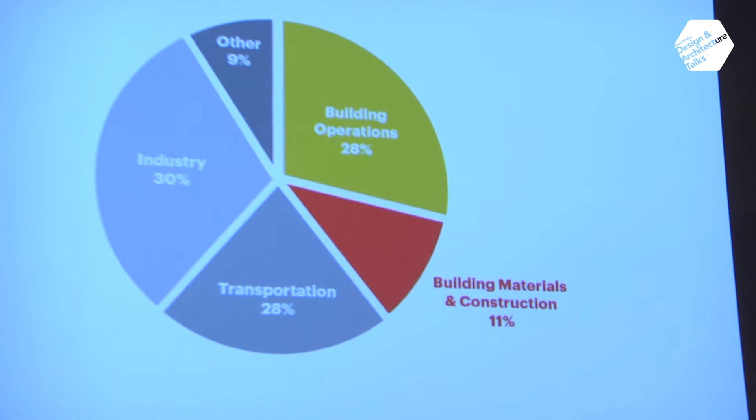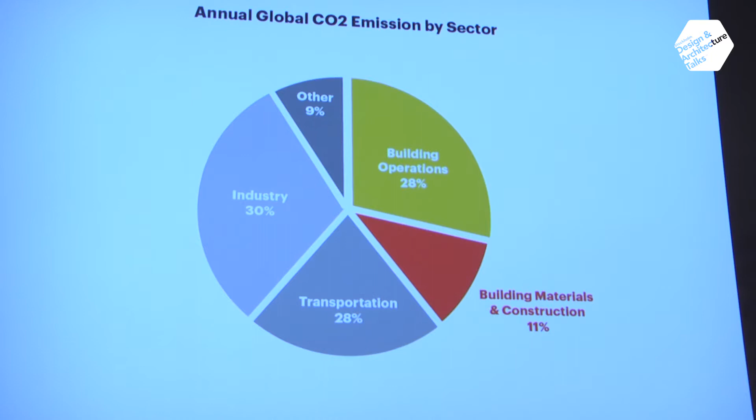It's such a fundamental, massive question when you think about what half is. First is, what are we talking about? Half of what, right? So we think about global emissions on an annual basis, 40% of emissions are attributed to the built environment. Of that, roughly 30% is the operations of a building—the heating, cooling, lighting of that building—and the other 11% is the embodied carbon of the project, the actual carbon required to make a project, make a chair.

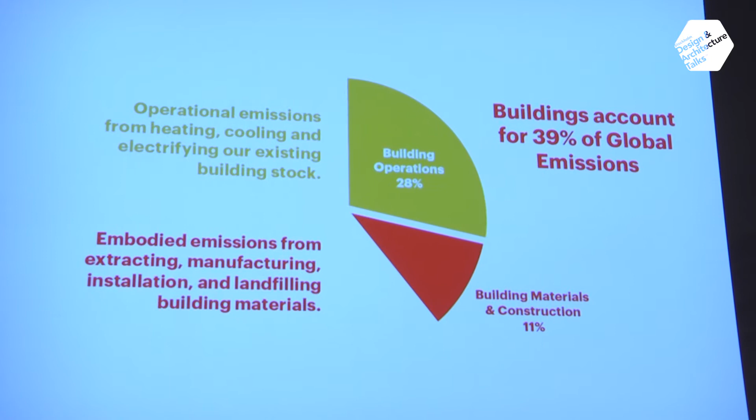I think the fundamental thing that I've come to learn over the last year is this question of embodied carbon has been a complete blind spot for everybody in our industry until very recently. Certainly through my education, there were two words that were never even spoken around a lecture. What this means is that every month, right now, we're constructing the equivalent of New York City—not just the city of Manhattan, but all five boroughs—and that total square meterage of that city is being built into the world every month. And that means every year we're going to add that much square meterage to the operational budget as well, which only makes that thing even bigger.

Fast forward a little bit, a lot of this footage is going to find its place in Africa, in India, in developing settings, primarily where I've been working over the last five years and where I'll be showing you. So it's pretty important that we get this figured out right now, certainly in places like Europe that are in the middle of this, but very important that we figure this out in the parts of the world that are going to build a lot. And this challenge is massive when you think about it.

When you begin to just get your head around it—how do we halve the operational emissions of our current building stock? I'll talk about this room right now. This room doesn't have a shred of natural light coming into it; the entire thing is fed by a mechanical system forcing air into it. If we said to the exhibition, cut your utility bill tomorrow, what would they do? Massive problem. And then the other half is everything you build from today—how do you have half the footprint of the last project you just did? Where would you start? This chair—how could you cut half the carbon of that chair that we're all sitting on?

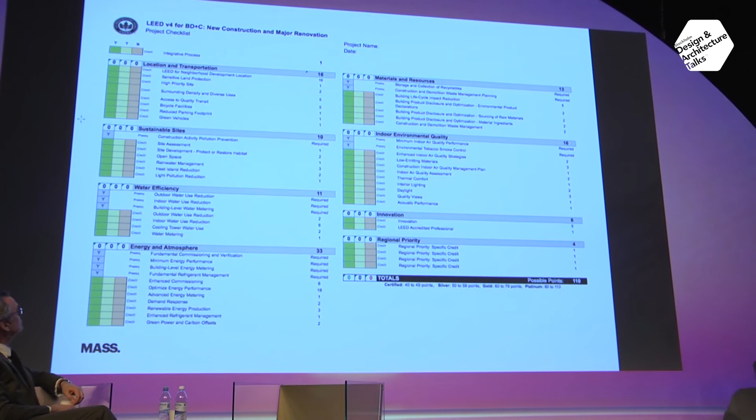Recently, it's encouraging to see materials and resources being reflected on a LEED checklist. 10 years ago, anything embodied wasn't even part of the calculus.

This has led to a mode of practice. This is from my governing body earlier, or this time last year, that really set me down this path of: what the hell are we doing?

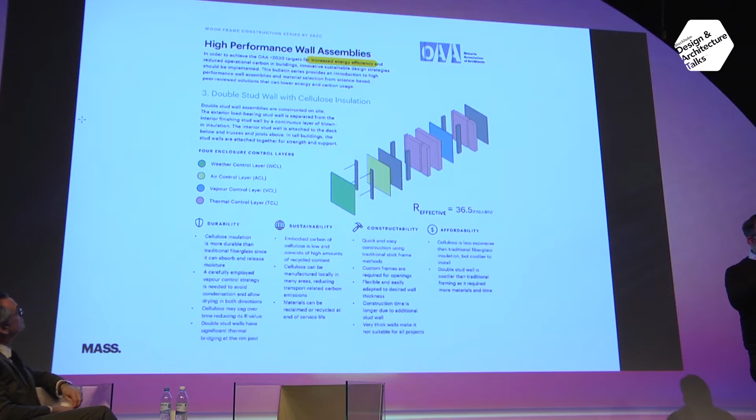This email talks about increased energy efficiency through 13 distinct layers, and how this is how we're going to move forward to meet the 2030 target of half. I started thinking, okay, what are you talking about? 7 3/8 inch EPS foam core, 3 inches of rigid mineral foam. What is that? Lightweight cladding.

There's that little green layer on the outside. This is what my professional body is telling me is the future of practice, right? Self-adhered liquid applied air control layers. Surely this is not the material we should be using.

In the 90s, in my childhood, born 1978, I recall vividly big movements forcing McDonald's to get rid of these materials from our food chain. We moved to paper. We, as architects, celebrate this material. We quite literally conceive our buildings out of it.

That's messed up. So this blue foam, this is like one element. When you dig into what blue foam is doing, is it sustainability? Look at all the things that blue foam does compared to rock wool and phenolic foam.

These are the materials that we are using to build our environment. This is what it's doing to the environment. So we're thinking about energy efficiency, high R value. We haven't paid any attention to all the other things around this, and I'll speak specifically around ozone depletion.

On the left is pretty much most of the building stock built after 1980. And on the right is a document from 1974 out of the AA. I continue to look at these and just think about how we have forgotten what it means to practice. We have forgotten how to build. We knew this at one point.

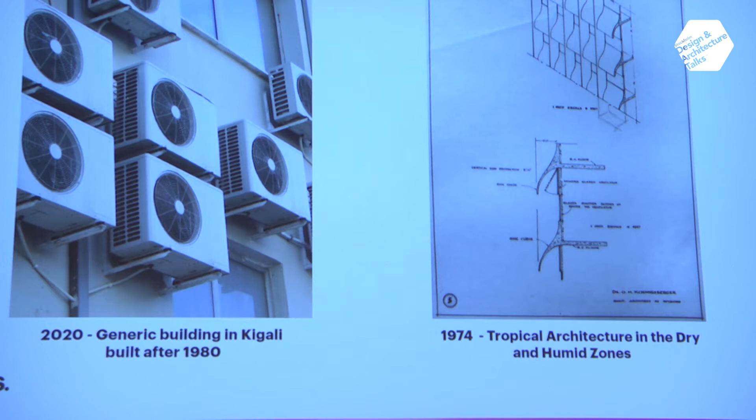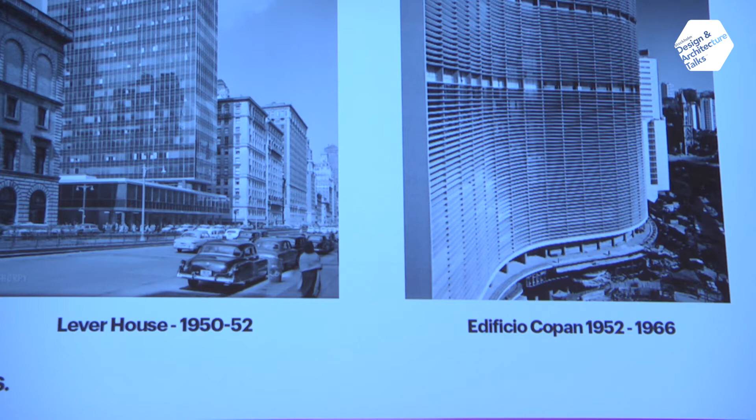What happened? Well, my basic theory on this is that there were two buildings built in the 50s that are pretty iconic. The one on the left, downtown, by Gordon Bunshaft, and the one on the right in Sao Paulo by Niemeyer. One of them considers the environment and one does not. And over time, one has won out.

And this was taken earlier this week. The building on the left is going up in droves, and the buildings on the right are coming down. This is the direction our world is headed, as if to say we have forgotten everything we've known, and we're rapidly moving forward towards a future that's completely unlivable. So I would argue we make a return to passive systems, maybe put some skylights in this building.

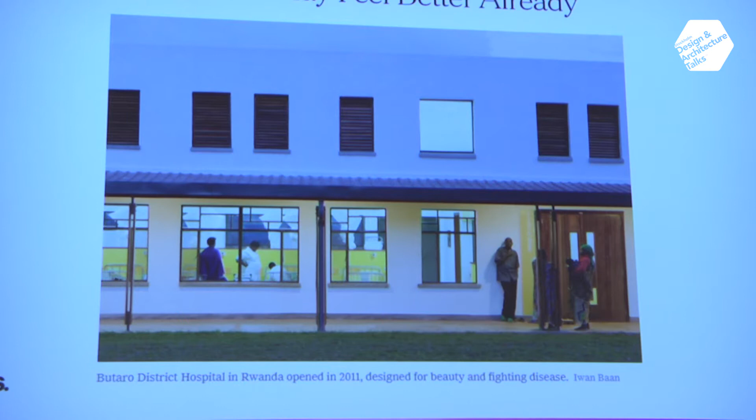We started, again, in Butaro, with this hospital, where there was no power. There was very little even by way of water, and this was a great opportunity. These constraints were like, oh wow, first principles—let's think about natural ventilation and lighting in healthcare.

We worked with two big thinkers, Paul Farmer, the founder of Partners in Health, and Dr. Agnes Binagwaho, who was the Minister of Health at that time. We literally sat down with them for a year to design a hospital, hand in hand with the doctors that would ultimately run it.

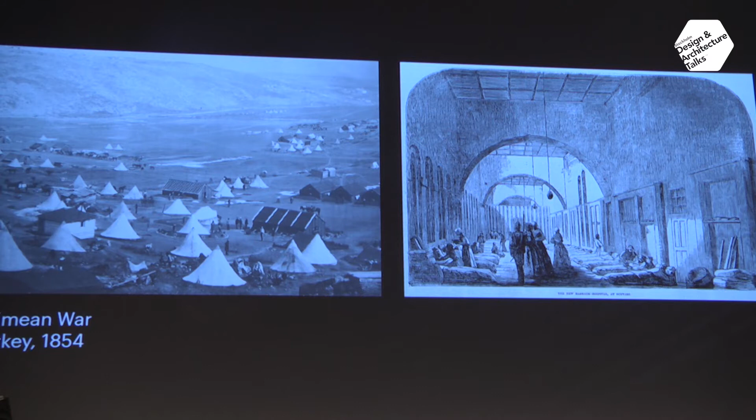If you look back in history, Nightingale knew this. She intuitively said, people in these tents in the Crimean War, they're getting sicker as I care for them—we need to rectify this. She came up with the Nightingale Ward, which served as a kind of model for healthcare for about 40 years.

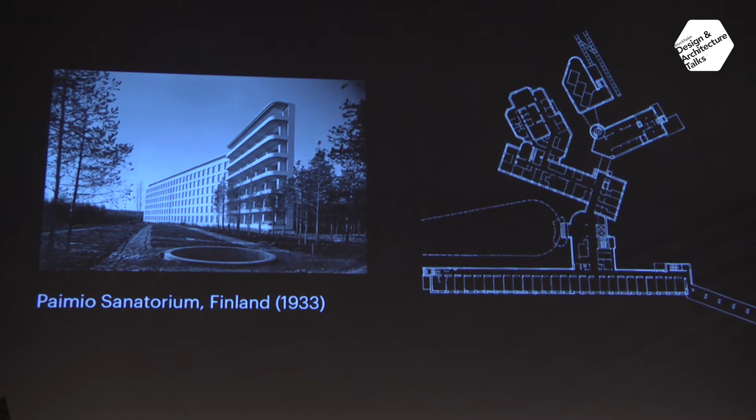I had the pleasure of visiting this project last spring—similar thinking about passive ventilation, access to light and air in a space. Sad to see this is not even functioning as a healthcare facility anymore. And what's happened over the last century is this.

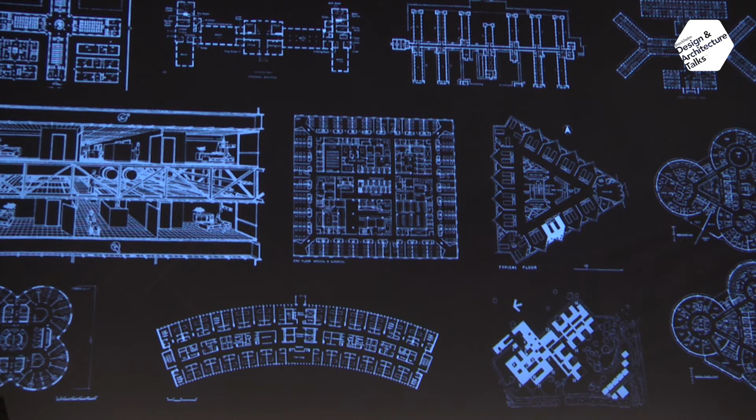We moved from Nightingale wards around to ultimately the room my son was born in, which looked much like this, a box, not unlike the building we're in right now, which is alienating. It has no access to the outdoor environment. If you work as a doctor, they have the worst working environments of any profession I can imagine. They literally can work a shift without seeing the outdoors.

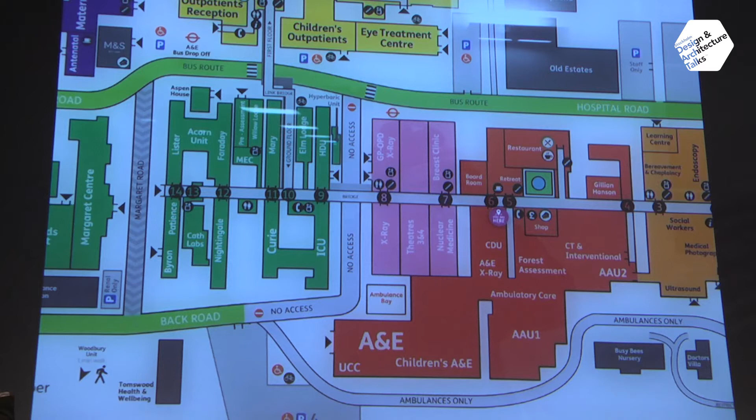This is the hospital that I spent some time in over Christmas, which, as you can see, is basically a Frankenstein of all these typologies put together, which you get lost in. They're very difficult places to understand. And this is the state of a lot of healthcare infrastructure around the world.

So we said, okay, let's not do that. We don't have electricity. Let's limit the floor plate, make sure that we don't need lighting in the event of a brownout. We don't have forced air. Let's use convection and kind of passive ventilation to make sure that the room is getting its air changes. We put all the medical gases and power outlets into one wall as opposed to two.

We kind of inverted the Nightingale, so in the event that you need to upgrade things, it's pretty easy to renovate the space and retrofit it. And the beds lastly face out, they face out to the landscape as opposed to facing in. So as a patient, you have a view to the landscape. All the circulation is exterior as opposed to inboard. And finally, it's a part of the world you should be looking out.

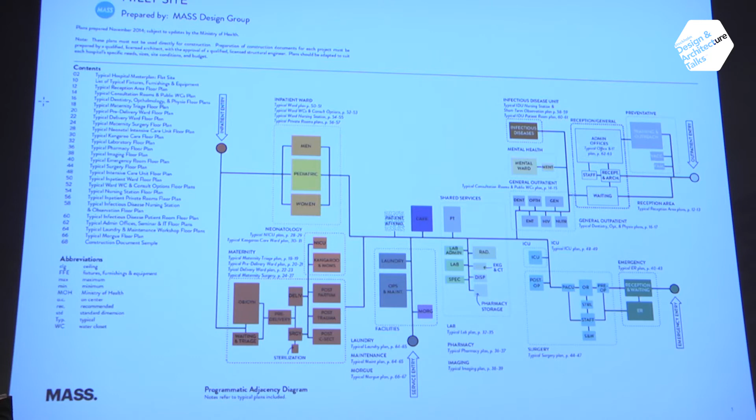Beautiful. Recovery times, apparently at this hospital, are far better than the one neighboring. On the back of that, the ministry said, great job, guys, we have 31 more. Okay, well, let's help you develop kind of the DNA for these other hospitals and unpack the ones that exist. How can we reconfigure them and make sure that any addition you do in the future is done intelligently?

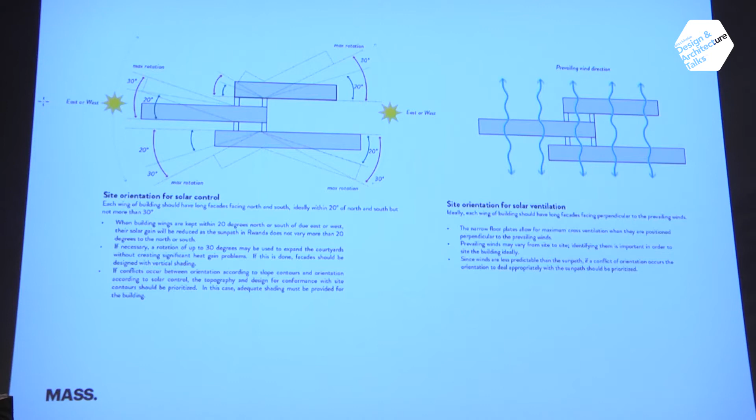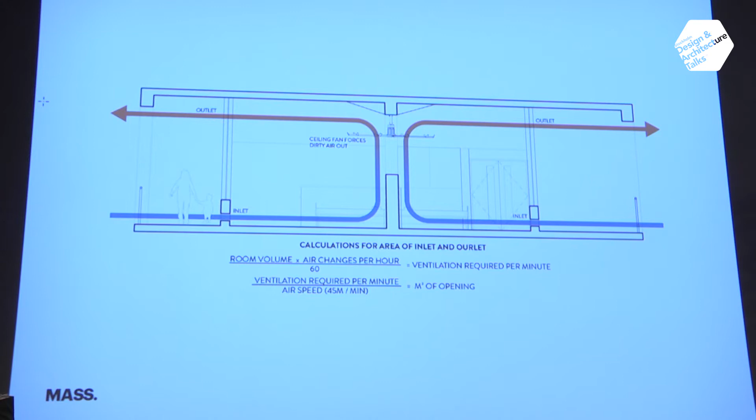Basic instructions for the procurement department: how do you site buildings, how do you make sure that you're orienting correctly for wind, for sun, how do you look at things through basic thermodynamics, the heat coming off your body to help buoyancy in a room, so you don't need ventilation or fans in the event of outages. You're going to get those air changes just through understanding basic thermodynamics. The floor plans are these heavily annotated documents, so that anybody can read them, not just to say build this, but understand why, so that if another designer comes along, they can take it and modify it around the parameters, the kind of minimums and maximums that we established.

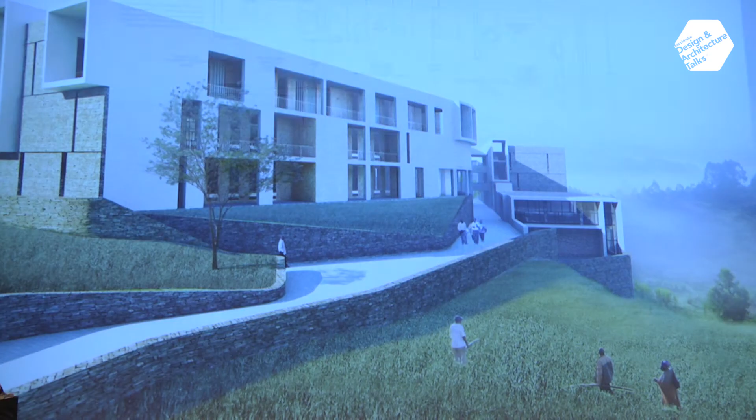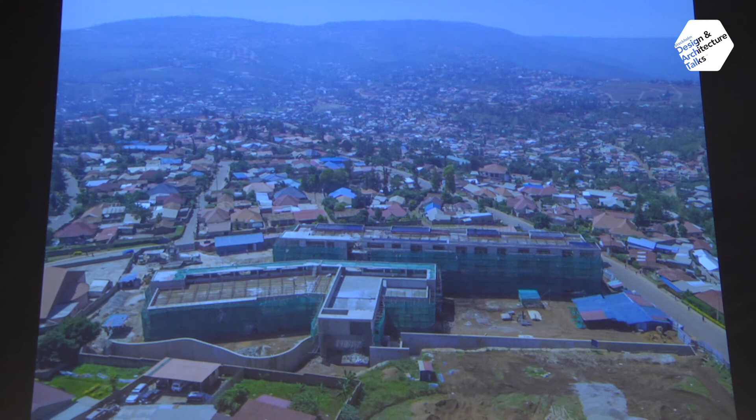They asked us then to test drive—okay, good, we want to see a couple of these. So this is the Munini District Hospital, in a very rural part of the country, due to be completed this year. And they said, let's do another one, but let's do it in Kigali. So this is Nyarugenge. This is the rendering, and this is yesterday—it's almost complete.

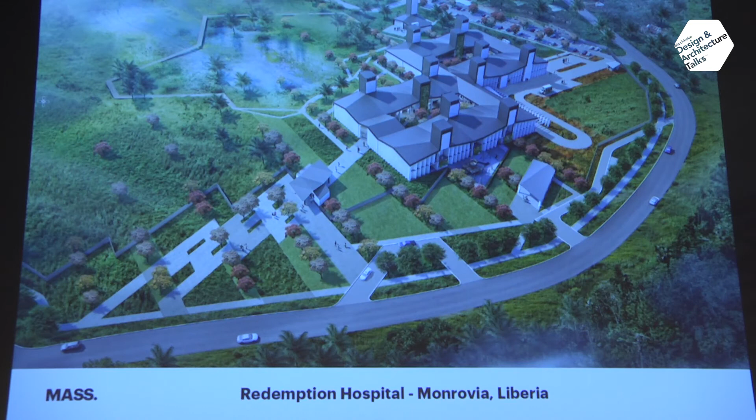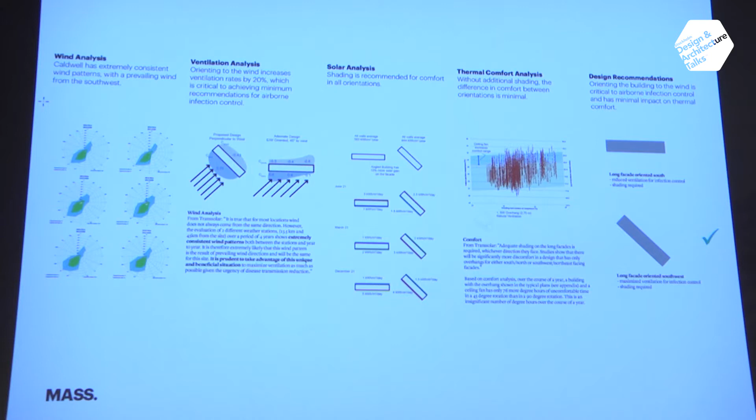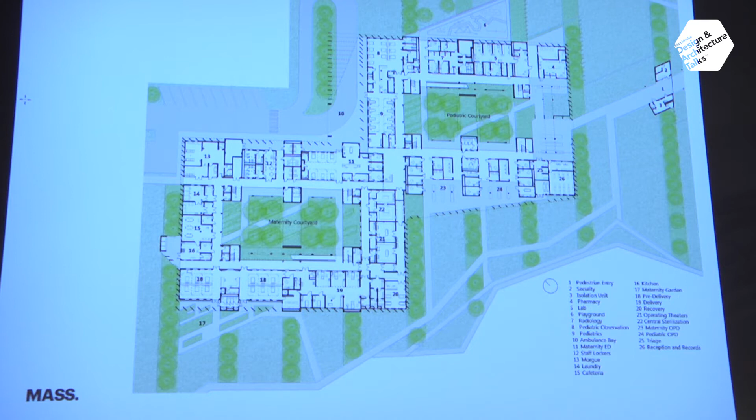We then asked to go to Liberia, a totally different environment, not at elevation, hot, humid, rainy, to do the Redemption building, working with Transsolar—similar thing. How does this building breathe by itself? How do we get buoyancy in a room? So we adopted solar chimneys as the main strategy for airflow. You can see these kind of knuckled courtyard buildings here, and the stairwells kind of double as that duct, the kind of large ductwork for the project. And ultimately then the chimneys become the totemic items of it, like the reading of its performance becomes its architecture.

I'll move to the embodied part. I think that the passive stuff seems obvious when you look in history. We just need to start doing it again.

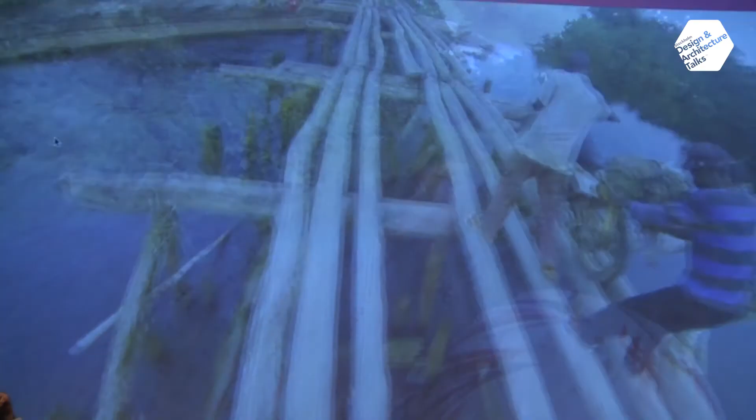I'll show you two projects that talk to this. The first is a school in Ilima, Congo, and there's a little movie here. Turn the volume up a little bit.

We were asked by the African Wildlife Foundation to help them build a school in this part of Congo that had an endangered species next to it, where they brokered a deal with the community: we'll build you a school, we'll teach you how to farm, stop hunting this endangered species.

This is what the school looked like when we started. The first thing we did, we spent three weeks in the community, meeting the people there, understanding what they need, what materials are available, what trades exist, where things come from. We looked at what they're building out of, and we took a bunch of these back to the lab and performed compressive strength tests on them to understand—okay, can we use this stuff?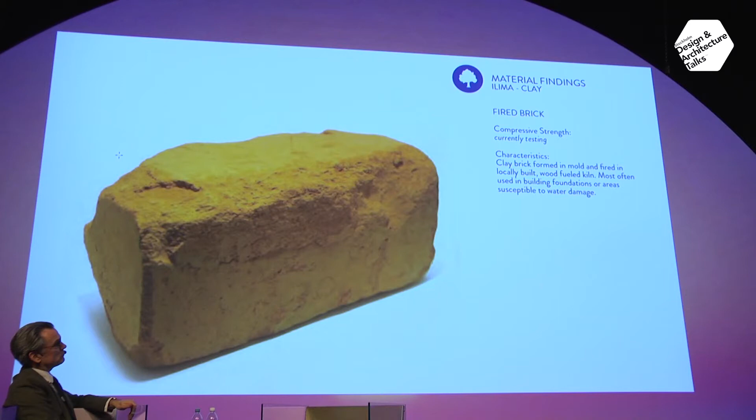So this is one of the local bricks. A lot of the weaving that they're using is this kind of rattan, which we've seen everywhere.

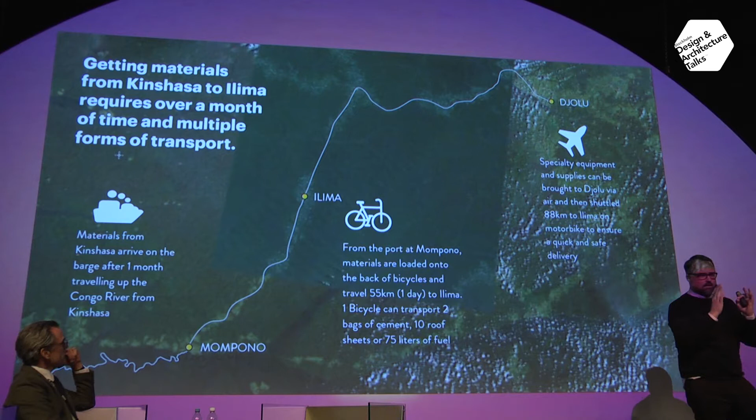To get to Ilima is extraordinarily difficult. From Kinshasa, which is really the center of the entire country's economy, it takes up to a month to send things on barge to this little town called Mompono. From there it would travel about 55 kilometers along a path as narrow as your shoulders on the back of a dirt bike to get to the site. So that instantly really limits your material palette of what you can bring in to build with, to what can fit on the back of a motorcycle.

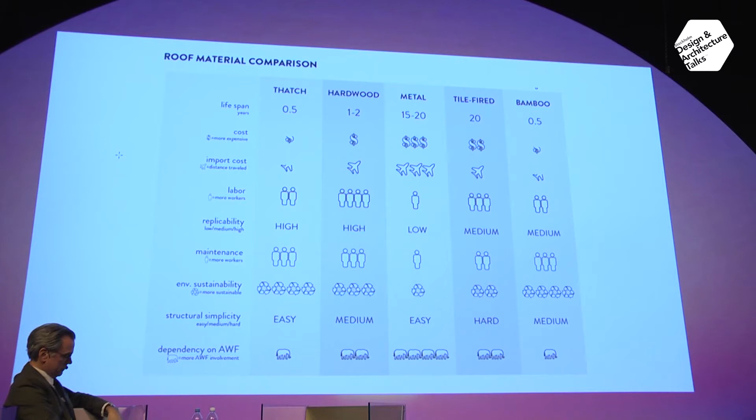We use that kind of comparative table of—what are you going to build out of this? What's it cost? How many people does it hire?—to build up an understanding of what we should make the building out of. Our hand was really forced to us that most of it has to come nearby. Most of the project is sourced within 10 kilometers of the site, and we imported things like nails, hammers, and saws.

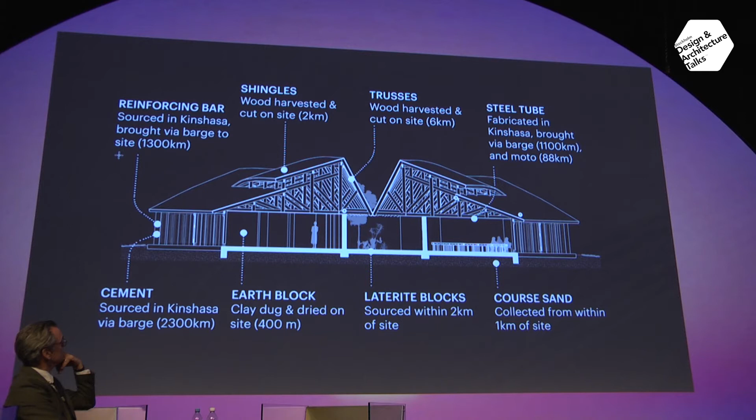The roof tile, I think from material innovation, we took a lot of wood samples back and found this specific hardwood had a lot of similar properties with cedar, so it would work really well as a shingle. We brought in people to teach them how to froe a cedar shingle—obviously a well-known tradition, certainly in parts of North America.

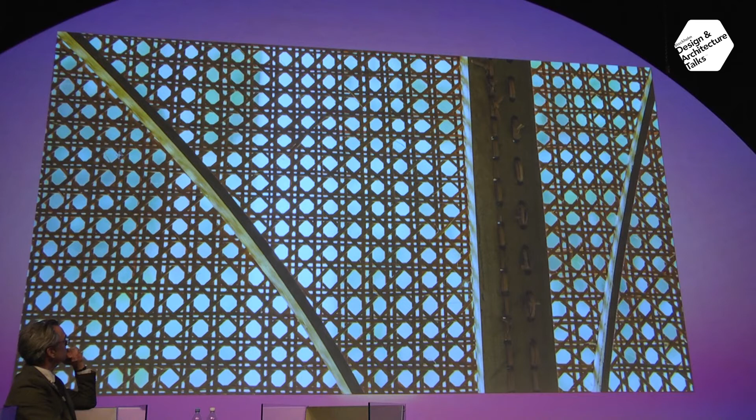The rattan was used as a screen device for a lot of the doors and windows. As you can see here, the whole project kind of opens up to the large playground.

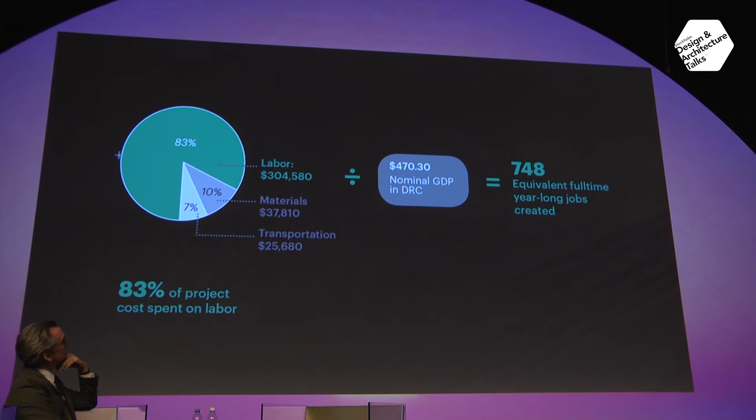We were really looking at this question of impact. What impact is this project having economically? We didn't have a lot of money to build this project, it's about $350,000 to build a school. And of that, how many people were hired? Great, we hired pretty much everybody in this community, and understand the unemployment rate in this part of Congo is probably like 98%. So we gave people jobs and skills that they can take elsewhere.

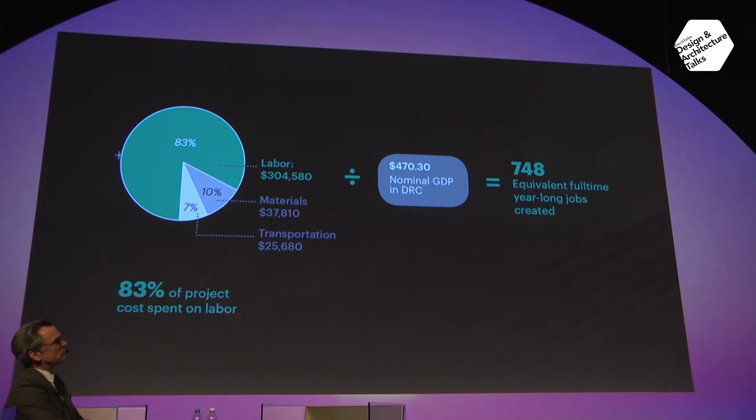Where was it spent? In a country historically known for pillaging its territory, where most of the money funnels to Kinshasa, as you can see, most of it didn't. Most of it really just found itself very locally to this project, which is great. Again, very little by way of development in this part of Congo.

And from a carbon footprint, it's almost embarrassing how good it is - 28 times less than a global average. This is what's possible when you source locally and find materials around you that have low footprints. It's just a question of searching and asking.

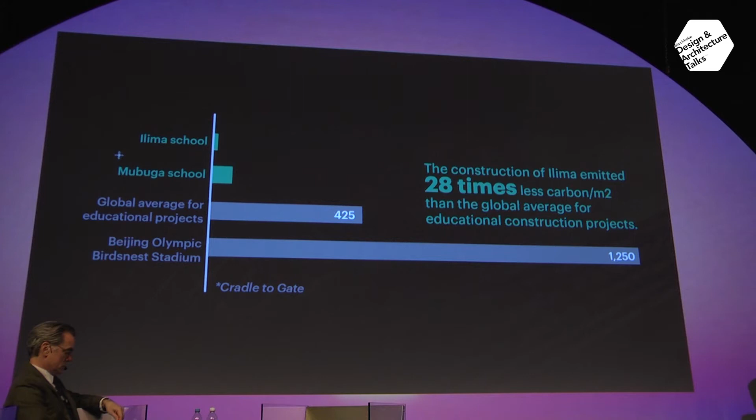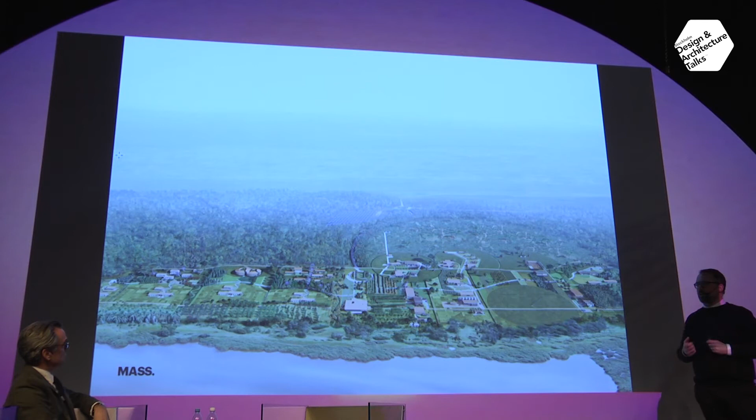The last project I'll show is this School of Agriculture. So 3 years ago, we were asked by the Howard Buffett Foundation to work with them to develop a whole ground-up school of conservation agriculture. They see agriculture in this part of the world as the pathway to peace, and more of a conservation agriculture, not as a replication of Western industrial agriculture, but as a way to actually have ecology and farming together through the notions of One Health.

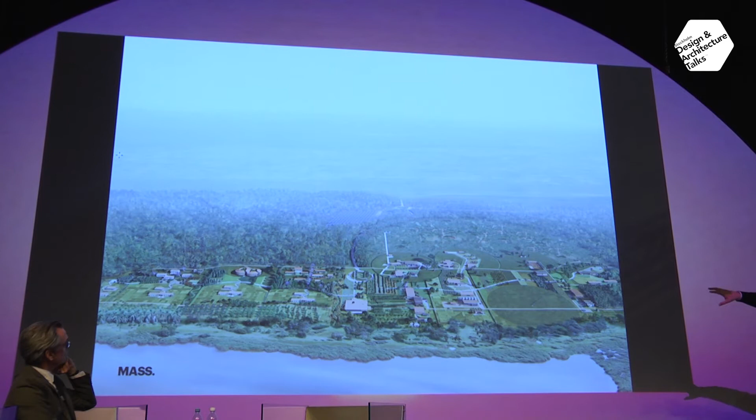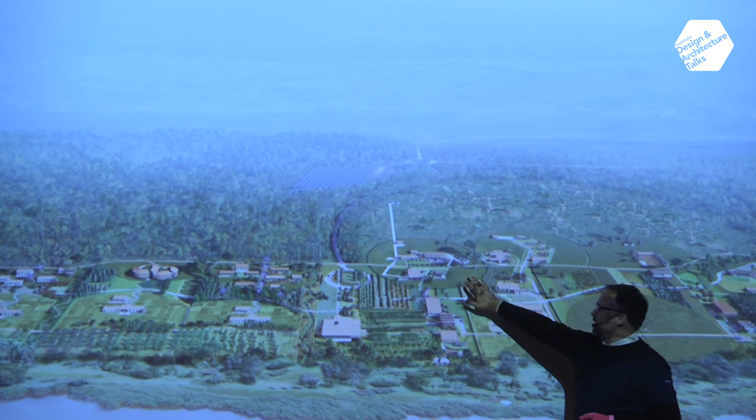So this is an overview of the campus. On the left, there's first-year farms where 21 students work together in their first year to get the sense of what it means to be a smallholder. And as they move in the upper years, they learn different specialties in farming. There's a dairy here, there's a fruit and vegetable enterprise here, there's a row forage pivot irrigation system on this side of the campus.

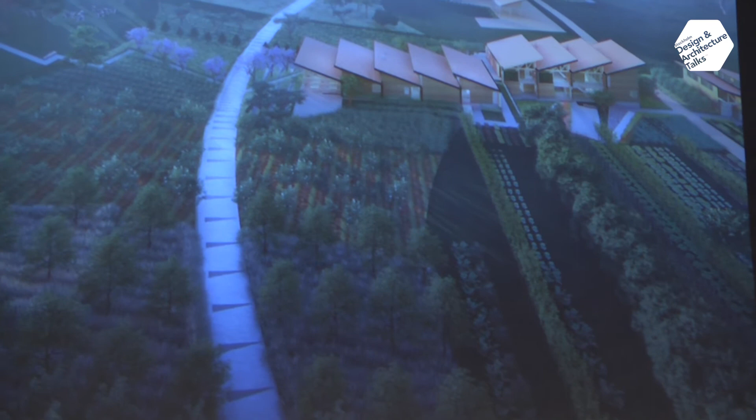The question we kind of asked is, how do we harvest the architecture from the campus? How do we take this agricultural sensibility? So the project is built almost entirely out of the earth from the site. This is the upper year dorm in the foreground, and that first year farm and their barn in the back there. And this is looking at the enterprises, which are a series of shed-roofed clerestory modules that go across, very industrial, agricultural based.

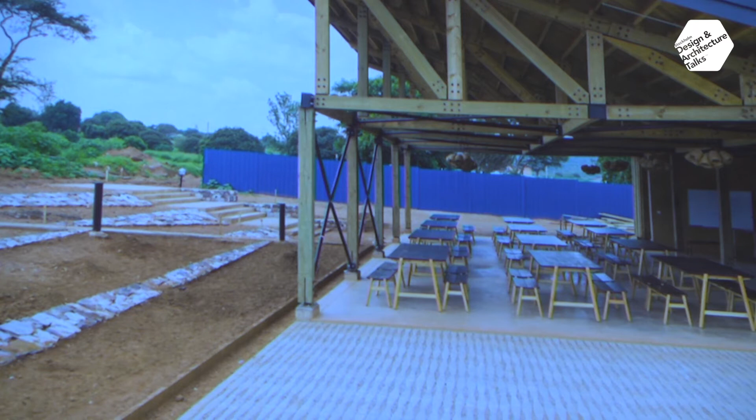This is what it looks like, about a week ago. And we really, again, tried to push materials that were low carbon. I'm a Canadian - using wood was intuitive. This part of the world was very innovative, using things like local, fired ceramics.

I got a project in Denmark I love, in Ribe. I cribbed the notes on that one and applied it in Rwanda.

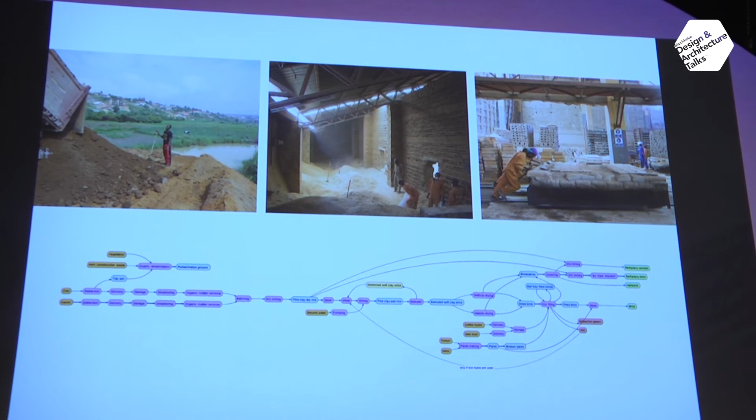We worked with Ruliba, the local brick maker here, to figure out the EPD for them. And I asked my team, okay, go all the way back to where it starts, go to the quarries, trace the whole thing out, and see every step along the way how they're expending energy. One thing, this image in the middle is their biofuel source - they basically have a monopoly on all the coffee husk coming out of the country that they use to fire, which is a better option, obviously, than firing with wood or other fuels. And here you can see one of the pallets that had just come out of the kiln.

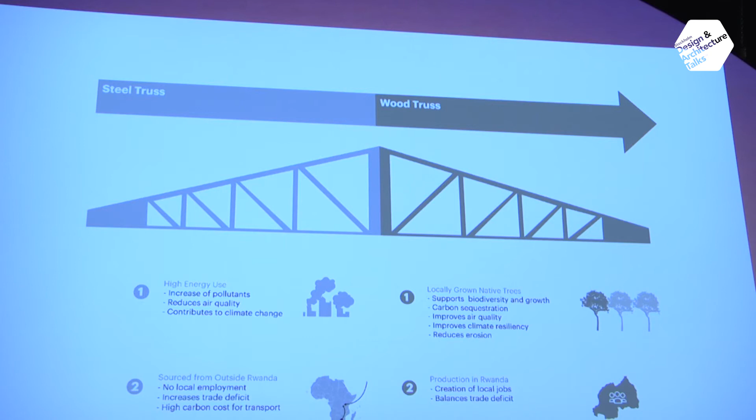This move to wood, as I've alluded to, this is a part of the world that sees steel as progress. I think as a stand-in for so much of the world, concrete and steel is development. We see this move towards wood, or trying to promote wood as a construction material in this part of the world, as also having ecological, positive impacts. For every tree you cut, plant two more. Think about this as a restorative act, a regenerative act.

So we found the one plantation in the country that the Germans had planted 30 years ago. Again, what's there? What can we use? What dimensions are they typically cutting? They didn't have a kiln, so we front-ended some money so they could get a kiln to supply the project. We tested it—it's not the best stuff. It might not pass grade in other countries, but we're going to work with it. We're going to design to what's available.

We did the math in-house and pulled all the standards from multiple sources, took a norm, took a conservative estimate, and did this to ultimately arrive at what the footprint is. And this is what it looks like. It's not foreign—this is just earth blocks, a ring beam, and some wood frame.

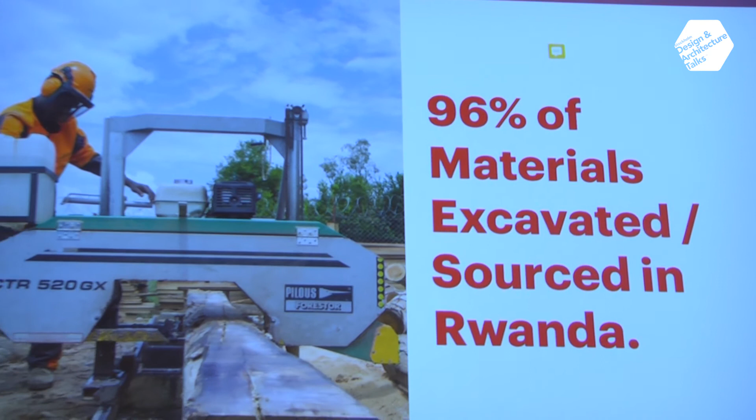So the total project, 96% of materials are sourced in country, which is a great sales pitch to any government. Of that, the heavy items, all the soils, were sourced within a mile of the site, so the campus is kind of in the middle there. Basically the sand and gravel and soils pulled from the site.

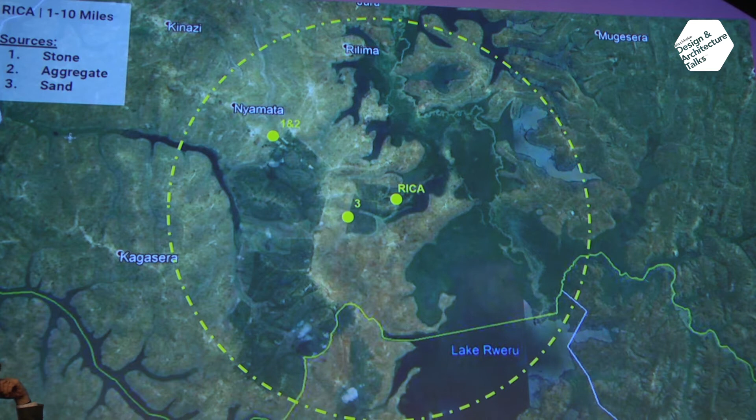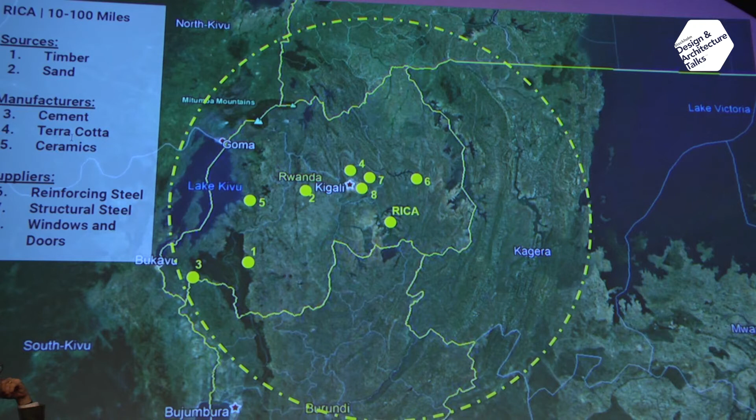Zoom out 10 miles—again, most of the heavy stuff within the district. Zoom out to 100 miles—most of the building materials, most of the weight, again, all within the country. We had to go regionally for more of the specialty items like the fasteners, the pipe, the cable. A lot of them came out of Nairobi. And then finally, the specialty items came globally, like the solar.

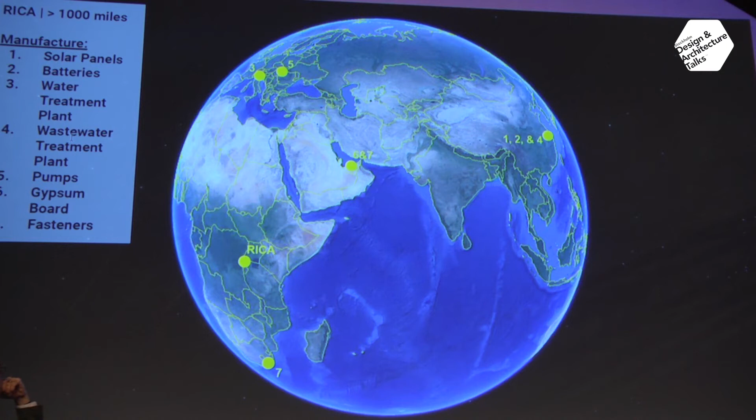On the labor side of things, 98% of the project labor is within 100 miles of the project. And that's all labor, not just the construction labor. This is the district it's in, Bugesera. We were told by our contractor, 'We've literally hired every able-bodied person we can. We're tapped out.' So the economic impact of this is really finding itself immediately next to the site.

This is what the architecture looks like. It's rammed earth walls in areas, earth blocks. As you can see, here's some of the furniture. This is the student housing. We took this opportunity—it's a furniture fair, so I figured I'd end with the furniture.

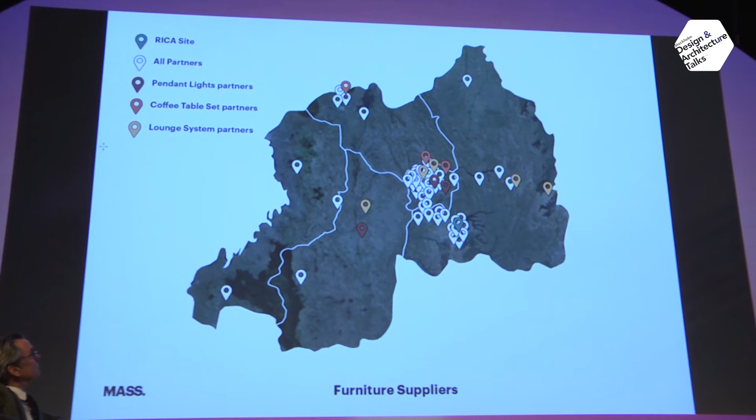We asked the design team, okay, we've got roughly $2 million. Get it into as many pockets as possible, and use materials that have low embodied carbon. That was the mandate—just figure that out. So this is basically all the sources, all the co-ops, where things were coming from.

And this is trying to pair these diptychs here of the tile on the left that's locally fired by this very small—the godfather of pottery in Rwanda on the right there, overseeing his protégé making the tile. The weaving, part of the country that has a really rich weaving tradition, to make things like the lights in a lot of these places.

The carpentry—literally bought all the wood in the country to make the furniture, for better or for worse here. All mostly made in various cooperatives around Kigali. Metalworking again, there's a Gakinjiro in Kigali where you find all these metal workers, and we worked with them to do custom handles and simple furniture.

This is for the faculty offices. And then finally, these weaving cooperatives where we married some of the local metal manufacturing and then took the frames back to these cooperatives to fill them out, which ultimately became the surrounds and these couch backs.

So the question that's probably in the back of your head is, great, you can do that in a place like Rwanda, but how could you possibly do it in Sweden? And I think I'll leave that open. Thank you.

How are you perceived, or how are you received, in Rwanda? Here comes the white man. Well, our office is 60-40 — 40% expats, 60% local. So we're definitely not a bunch of white men.